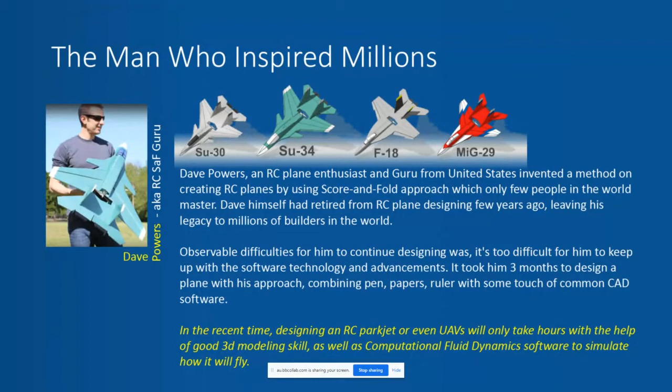Moving on, what is score and fold RC design? It's pretty much like origami of RC planes. We start with a very flat Depron, 5 to 6 millimeter Depron sheet, and form it into a 3D fuselage without any sanding, because we try to copy how origami objects are made. With origami, you have a piece of paper or more pieces of paper, then you just fold it. But with this 5 or 6 millimeter thick Depron, you cannot simply fold it, it will easily snap. So what you do is place tape on the bottom, the other side of the surface.

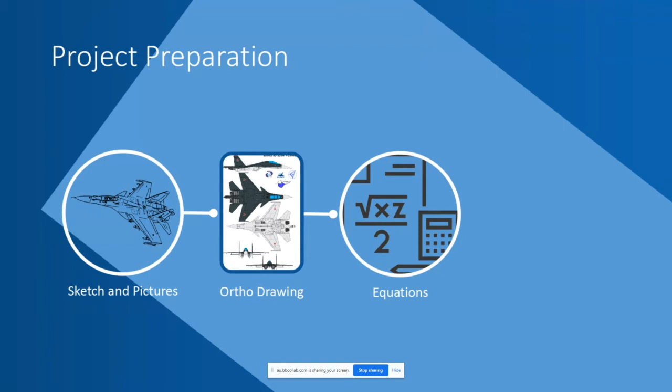So math is our daily subject, but not with the equations. Let me concentrate on this later on. Okay, so the next one is actually two. Come on, my mouse is not working again. Okay, that's it. Choosing the 3D software.

So fortunate that my company is one of the distribution partners for Rhinoceros, so I simply get Rhinoceros for my main design purpose software. For my hobby, for work, designing unmanned aerial vehicles or aerial platforms, for commercial as well as military purposes, Rhino has been doing the work for me very, very well.

But don't get me wrong, there are various software available out there, whether it's free or commercial. You have SketchUp, you have DraftSight, you have Blender, and for commercial you have Catia, SolidWorks, Fusion 360, and PTC. Any other software will somehow work. Just pick what suits you and enjoy the journey.

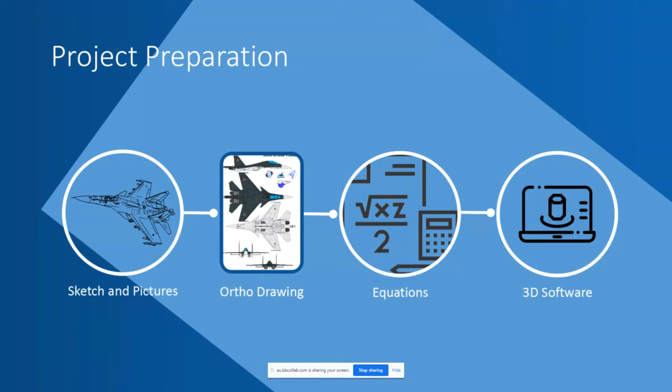Okay, so back to these equations. Don't get intimidated with this. There are many online resources available on the net.

Such as rcplanes.online. They have what they call an online calculator to actually define center of gravity. This is very, very important, because if you couldn't properly define center of gravity, any plane would not be able to fly.

So anything with wings, anything with a body, with also proper center of gravity, it will fly. If you have something much like a pencil or a pen, and you create or design a wing for it, and you define the center of gravity, and you launch it, it will fly. So don't get intimidated with equations.

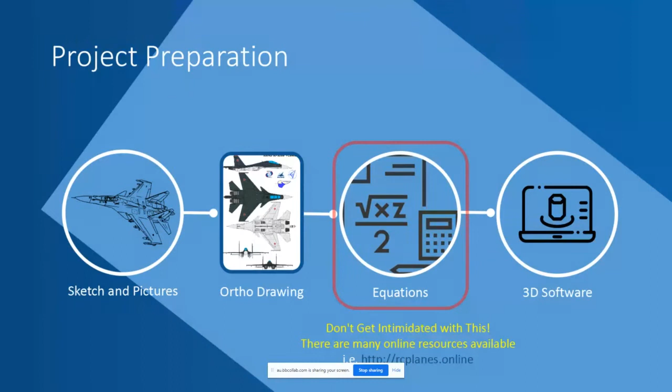There are a lot of equations I got from NASA journals or DARPA or published books. But to begin with, this source is enough because it has an online calculator and you don't have to get confused with many parameters.

So in designing a plane, we need to put common sense in it as well. And what are the common senses, right?

In order to define the size of the structural design of this, let me show you the SU-30SM, for example. I also place some considerations into the design that will minimize potential issues, such as the wing won't fit the plane size, or the wing size won't fit the Depron sheet.

That will be an issue because the largest Depron sheet available is about A0 paper size, about 1100 by 800 something. If it's too big, then you will have difficulties cutting the panels and constructing the plane. It's too small to construct, and too big to construct.

Another issue is once it's constructed, it simply won't fit a normal car for transport. So what's the point of building large planes when you couldn't bring them to your flying field? That's an issue. So based on my personal experience, I mostly design my planes with 750 millimeters wingspan. That's the first parameter I use to create or design a plane. So the wingspan is between 750 millimeters up to 800, or at most 850 millimeters.

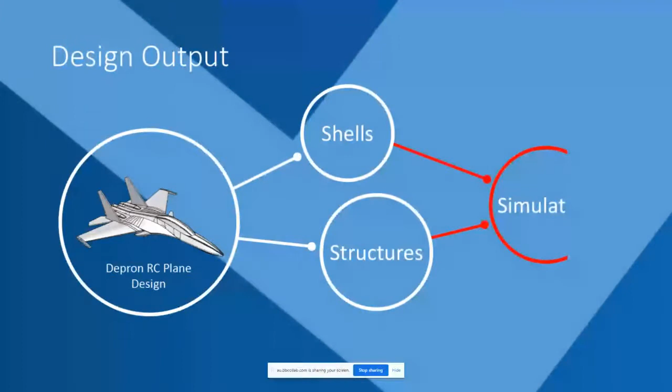After you design the shells and the structures, another optional way to know more about the plane is to simulate it. If any of you have heard about CFD, computational fluid dynamics simulation.

It's pretty much like having a virtual wind tunnel inside the computer. With CFD software, we could define and get a prediction of how it will fly with all-up weight, and with the design, we could know the lift, we could know the drag. Most parameters we could address in the CFD simulation.

Commercial CFD simulations tend to have a big price, like a couple of thousands of dollars, maybe tens of thousands of dollars.

But there is one very good CFD simulation software called OpenFOAM. It's free and it does the job well. I've been using OpenFOAM for my main design requirements, and it answers all the challenges that I needed very well, so I recommend you guys look for OpenFOAM. It's free, you can simply download it, and the visual programming is also available as ParaView.

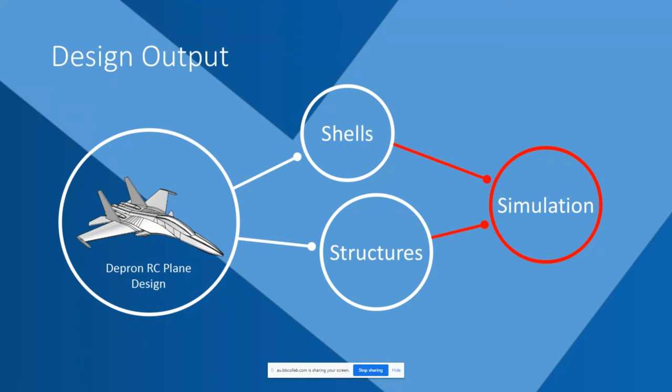So after we simulate, we come up to a design that we will create. This is the SU30SM design, 3D design in scored and folded form, in Rhinoceros. It had been through the CFD simulation with OpenFOAM. So this is the final design.

But before I go with this, I need to mention that if you're comfortable with Blender, SketchUp, or other software, just go with it. If you'd like to go higher, toward commercial options, you need to go with choices like SolidWorks, PTC, Rhinoceros, or other software. But many people out there have successfully created RC planes using Blender and SketchUp. Those two free softwares are available for everyone to download and access, and they're pretty powerful.

But I encountered a few requirements that those couldn't help meet for my personal needs. So I chose Rhinoceros to go with, and we could look at a live presentation with Rhino right now. Let me open Rhino, there you go.

So John, can you see my Rhino screen at the moment? Yes, yep. Okay, clear, awesome. Yep, awesome. So this is the SU30SM, as you see, right?

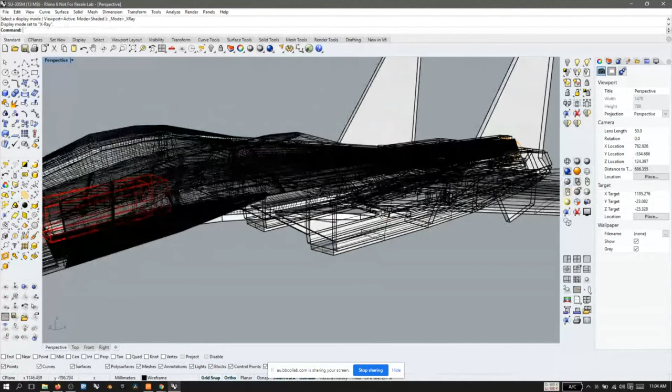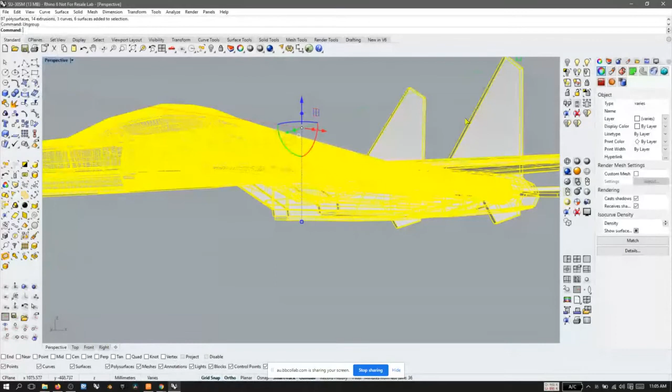If we see it with the X-ray viewport, see the structures, the tabs, the registers, it's there. Let me just ungroup this first. This is the internal view of the structures. You need to have registers to align the panels onto other surfaces.

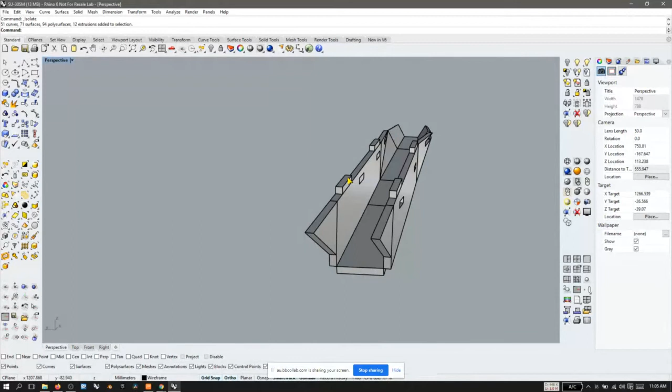So this is the process of how I created the design. Instead of showing it one by one, since at the moment we don't have much time to do it, I need to show you this. So, John?

Are the students familiar with 3D software? I believe they are, right? They have, but not Rhino. And OpenFOAM—just now you mentioned OpenFOAM is also a 3D software, right?

OpenFOAM is actually a computational fluid dynamic software, not 3D software. It's meant for simulating fluid, airflow, any kind of fluid dynamics—those could be simulated in it. It's quite resource-intensive, but it's free.

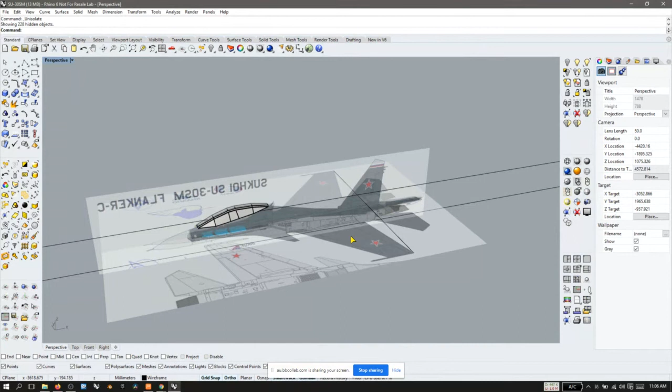Which means you can model something in Rhino and then bring it into OpenFOAM to create a simulation. Exactly.

So with this, let me show you. What I'm going to do is begin with a very simple process: the scale. I need to have the exact scale of a model which carries a 750 millimeter wingspan.

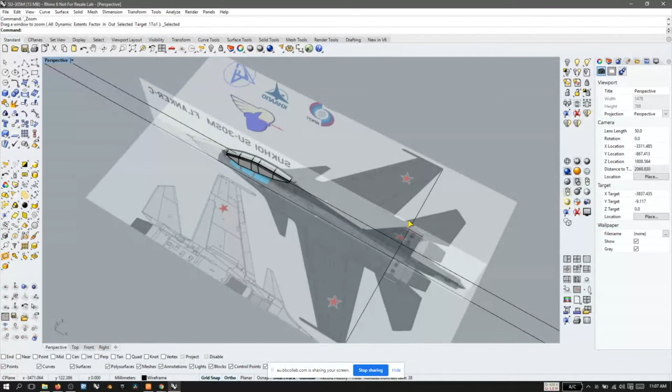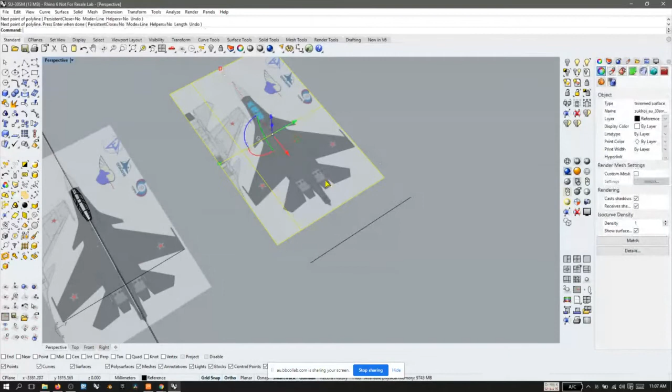So I just copy this. There, I'm going to have exactly 750 millimeters. Next point—that's 750. But when I drop the picture, it won't automatically be 750 millimeters.

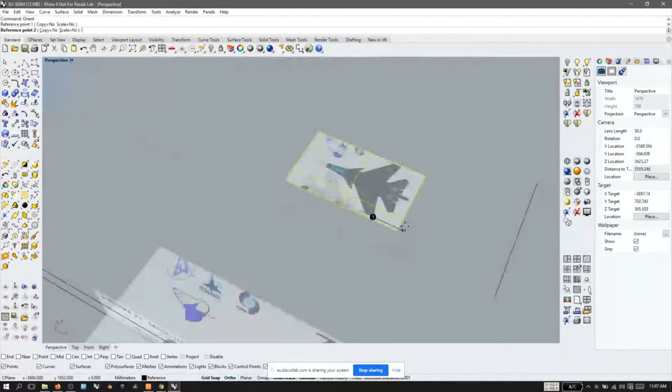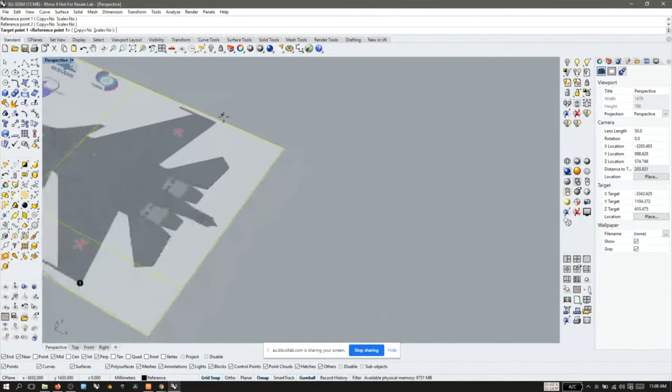Oh sorry, hang on, I did it wrong. Reference 1 here, reference point 2 here. Okay, I need to have exactly 750 here, here, and then scale it.

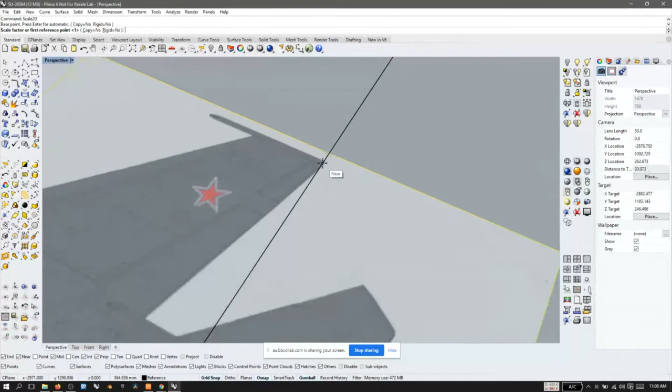See, it's scaling up following the reference, so I'd like to make it exactly 750 millimeters wide for the wingspan. There you go. If I click this and analyze how long it is—length is exactly on top of this, 750 millimeters upper left. Okay.

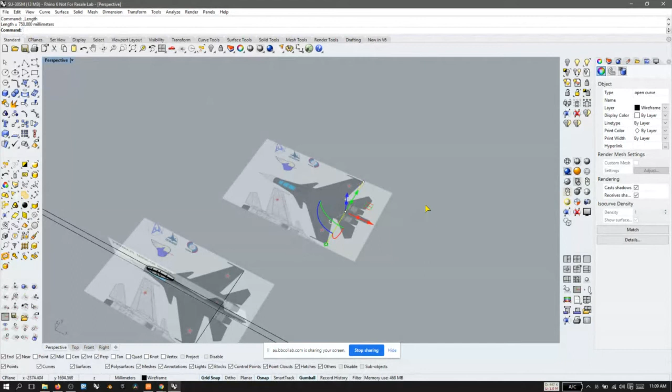So this is the size I want for the plane design. I match the other view as well, this one. After matching it, I begin with, I don't know, probably the wing or the canopy or something else.

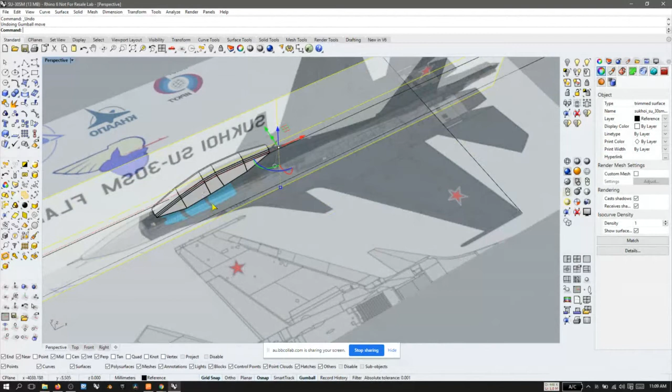I'm going to show you guys how to create the canopy. It's actually pretty simple—go with other view. Hang on, there we go. Here, start with line.

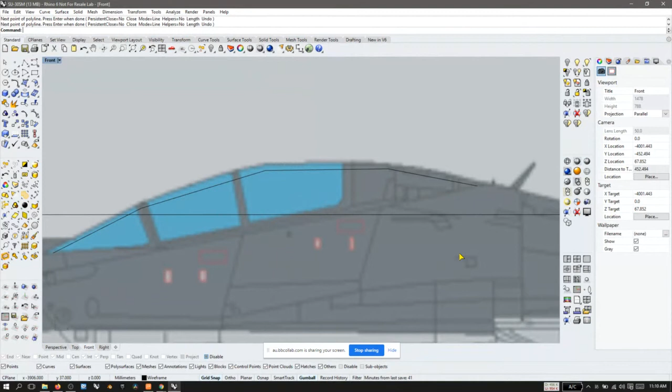Disabling it, starting here, probably, and here, here, here, and here—that's the first one. I need to lock this so I don't accidentally choose that.

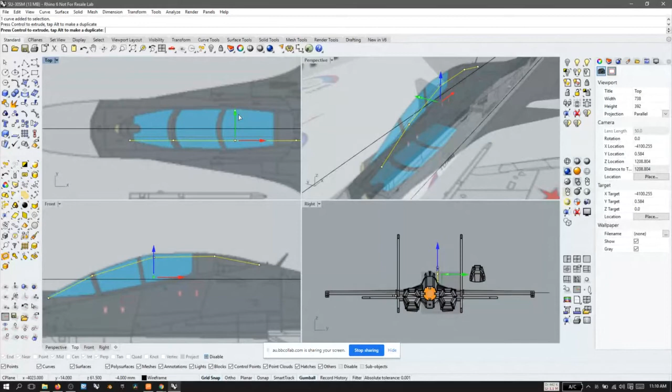This, we need to move it a little bit, and we could see the reference up here, right? And then we create another one from here. Okay, enabling the object snap again.

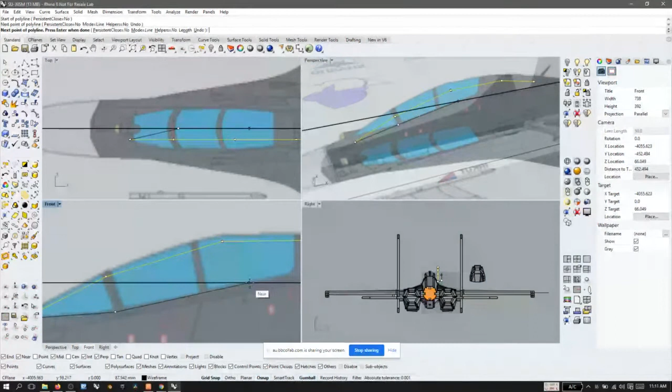Project: 1, 2, 3, 4. Oops, sorry, I actually selected the wrong one. Okay, should be here, here, here, here, and the last one is there.

No worries with this. So activate the sub-objects, drag it here, right, and adjust the point accordingly.

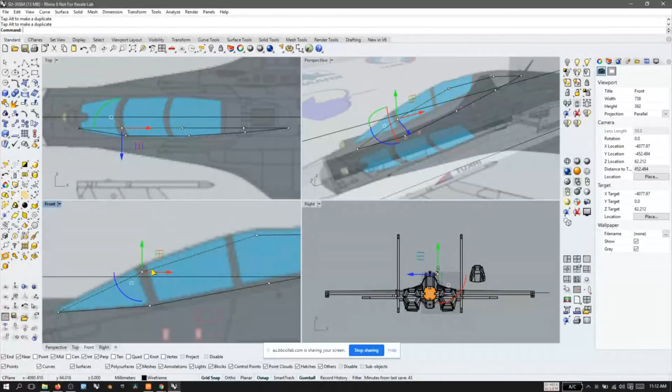Since we're using 5 to 6 millimeter depron, why not align the position of the points or lines exactly at the end of this guidance for the canopy, because it will carry about 5 millimeter thickness. So if we have a surface on top of this, it will have an additional 5 millimeters. So I need to reduce or move the lines and points and reference about 5 to 6 millimeters—not exactly, but it will help maintain the shape of the plane once it's constructed with 5 or 6 millimeter paper sheets.

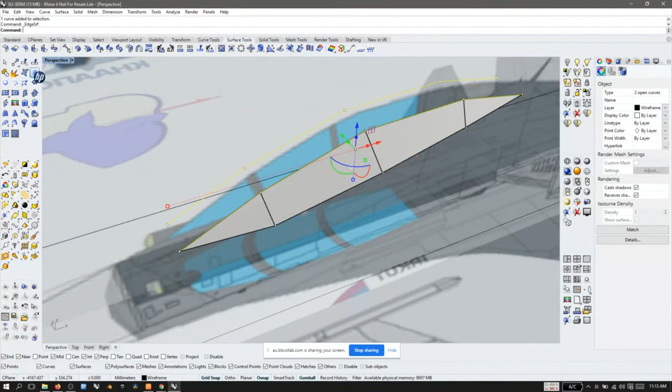With this done, I simply copy the other, this first line here—just simply, we can do it mirror, the old-fashioned way, like that. Then create a surface here using a surface tool, like that, and here and here, curve, create another surface. Then here we could just select these two and extrude it accordingly.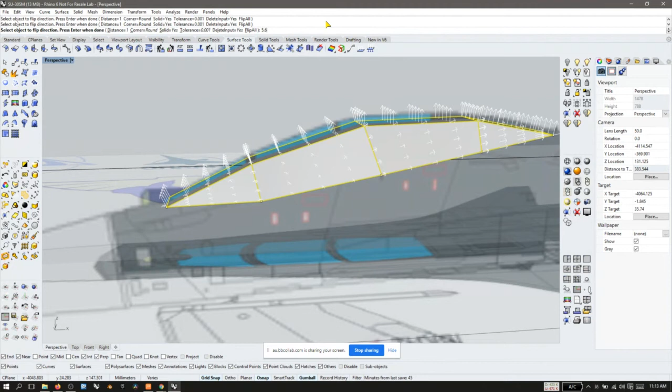So we'll give it a shell, like that, with 5.6 millimeter thickness of the sheet, because when I couldn't find 5 millimeter depron and only 6 millimeter was available, 5.6 is actually matching between the 5 and 6. So I'm using 5.6 millimeters.

Okay, that'll do. Select this and select mirror again. So we have three panels already to begin with.

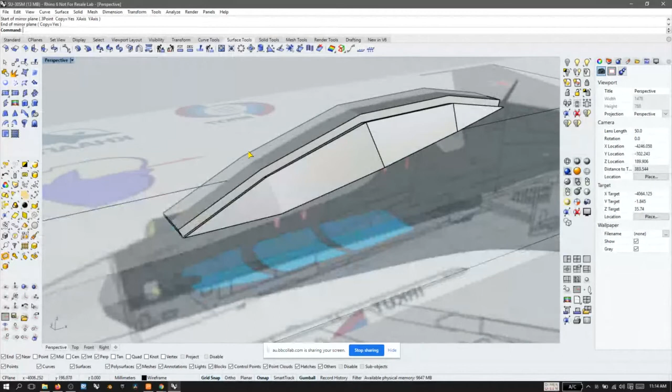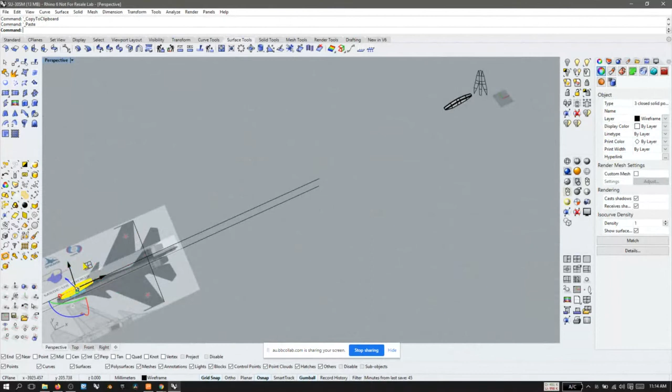Since it's constructed from very thin depron sheets, we need to convert it into a layout plan. So I just select these panels, copy it, paste it, drag it here—pretty much like this example.

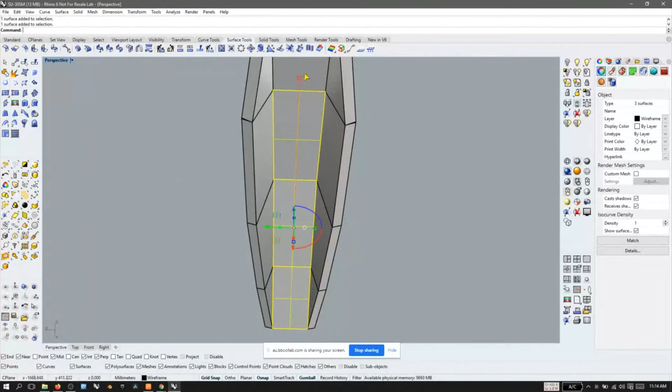And then what would I do? Simply explode it and select each—this, and this, and this—and put them together again. Select it, oh sorry, this should be adjusted as well. Okay, this, and this.

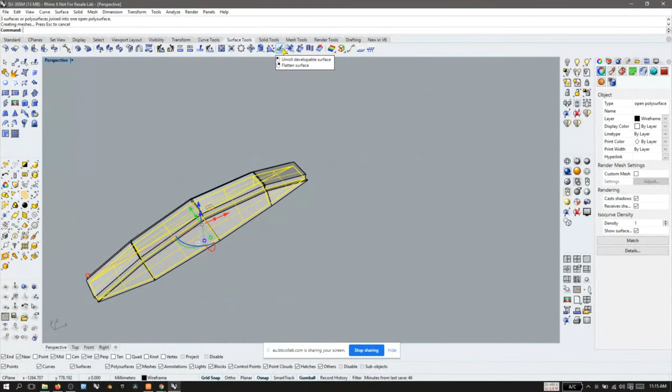One very useful feature in Rhino is actually unroll the surface. So this is the surface that we would like somehow to put as a plan. Okay, this one.

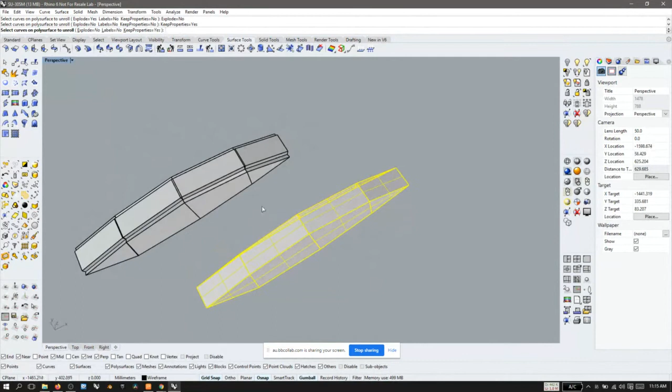Unroll, explode, no. Labels no, keep properties, yes. So I set all these options to the standardized options that I mostly use to explode, to unroll this. So I just execute, and this is the canopy. It's pretty much like a flattened origami object, a box or a bird or something else, right?

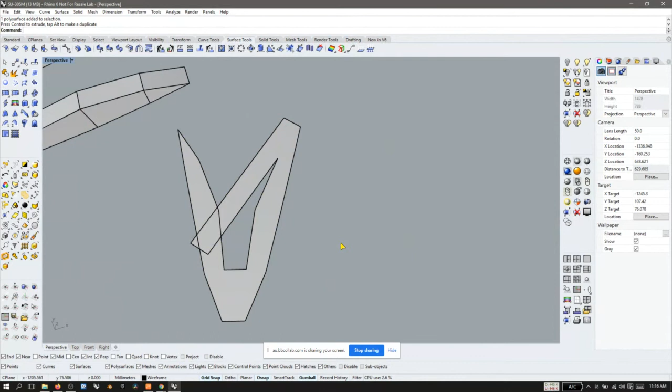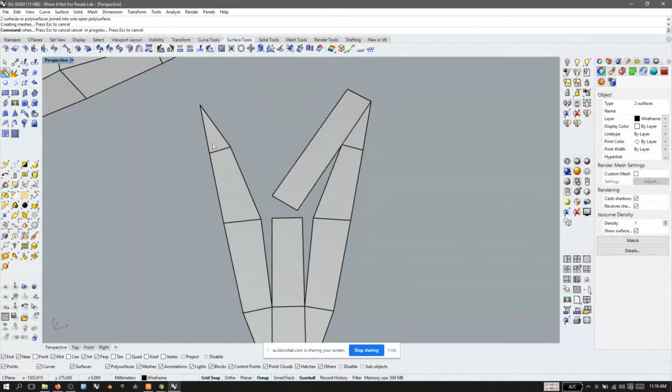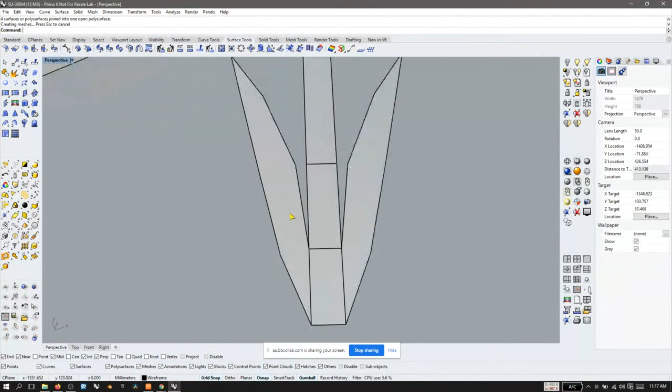And we could just unexplode this and have different results. So we need somehow to orient each panel first. Here, replace here, okay, or here we could just somehow union this, right, or join those, and then again orient it here. Or we can somehow do this and this, okay, and orient them like this.

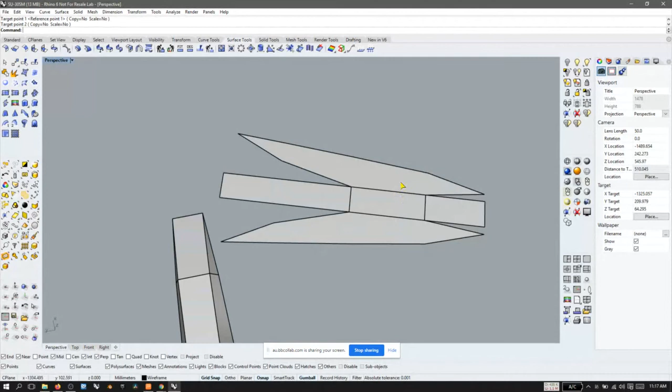Why? Because it's much easier somehow to actually cut panels, right? These two particular lines will somehow be cut as score, not cut, right? So I will score this and place tape below the surface of these two panels, in between the two panels there, because I need somehow to fold it, right?

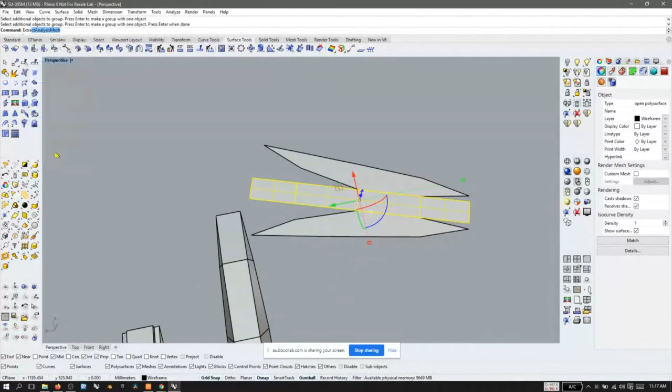So once the design is complete, join or group, whatever, okay, I could just simply extract the wireframe. Extract the wireframe here. Oh sorry, I need somehow to select all of them. Extract wireframe. There you go.

So I will somehow remove any useless lines. Yes, oh sorry. Yes, Bimo, I have... yep.

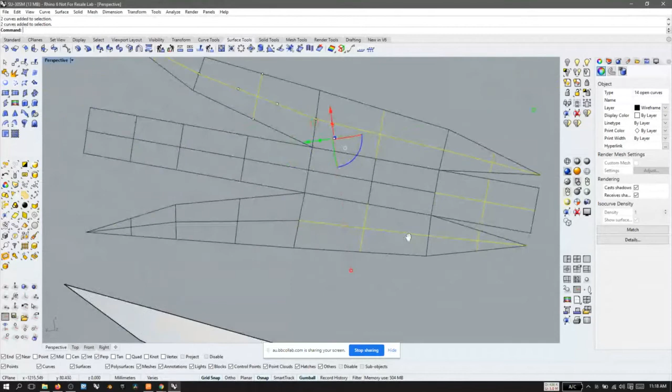A student, Bridget, is asking that the whole idea is that to do it like this, to do the orientation like this, is so that we can print it out using a 3D printer and then create, right? So the whole idea is to combine the 3D with the concept of origami and to form the plane.

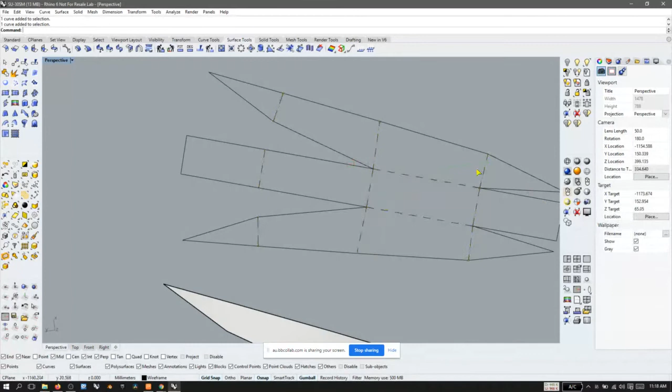Okay, it's actually not for 3D printing. We will somehow create a layout, right, for the Depron sheet. So, okay, let me somehow finish this. It's finished already, sure, right?

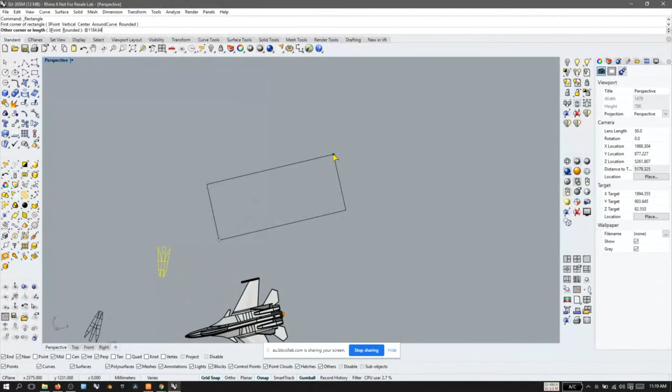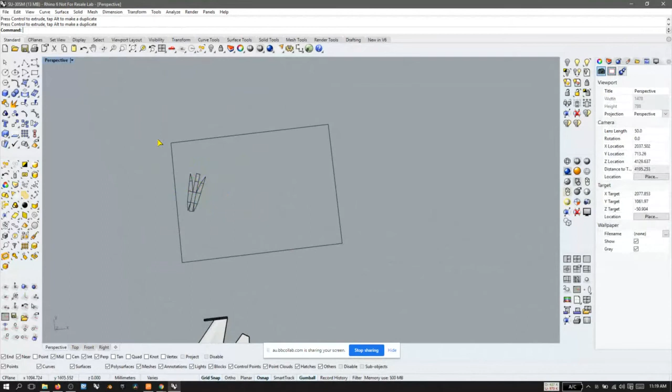So if you have, let's say, a Depron sheet consisting of 840, sorry, 52 by 840, right, like that. This will somehow be printed using a plotter or big size printer, right? So once you place it here and it gets printed, okay, this particular whole sheet will somehow be printed and then placed on top of the sheet. And the lines will somehow be our guidance, okay, to cut the Depron sheet. The dashed lines will somehow be lines that we need to score, not cut through, okay.

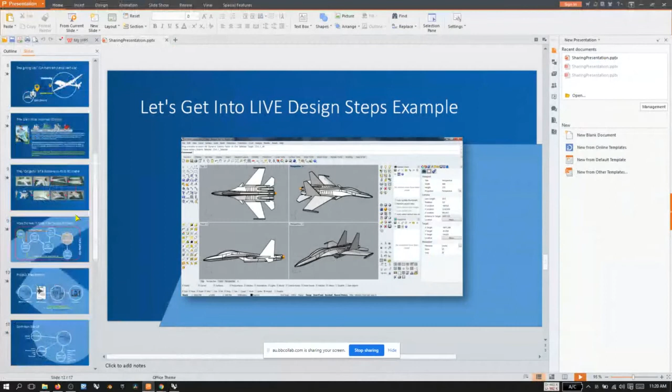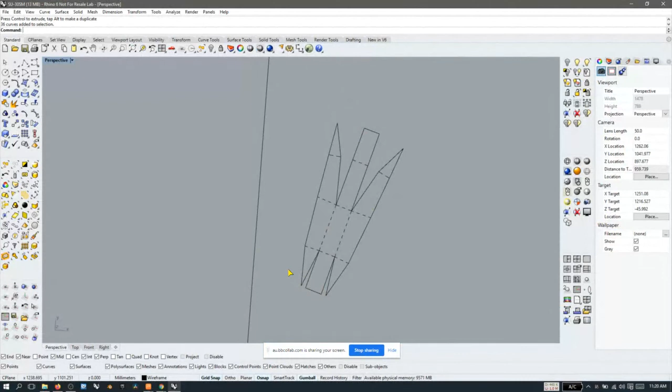So, okay, let me get back to this. Okay, these are actually the very flat Depron sheets, right? So prior to this, hang on, we have plans printed on paper and then glue it on top of the Depron sheet, on top of this, right? On top of the Depron sheet.

So the solid line will somehow be our guidance to cut through the Depron sheet, but the dashed lines will somehow need to have tape placed below the score line. Okay, so we will somehow break it. It will somehow stay there, and then we could simply fold it like this. I don't know whether it's clear for you guys to see, right?

So it's not for 3D printing. I haven't somehow moved into 3D printing for public release yet, but we already have some designs like tilting motors, right, so it could perform vertical takeoff or vertical landing. So the wing carries two motors at its end, right? So the tilt will somehow require 3D printed objects, to support the structures and everything else for it to be very, very rigid. But for this design, this particular design is actually for cutting the Depron sheets, not for printing objects with 3D printers.

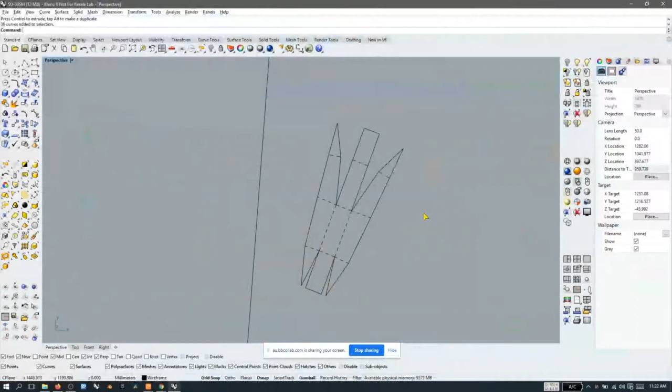So does it answer the question, John? Yeah, I think the student said it's basically like making a template. Exactly, a template pattern for us to guide us to cut the Depron sheet. I see. Okay, so basically...

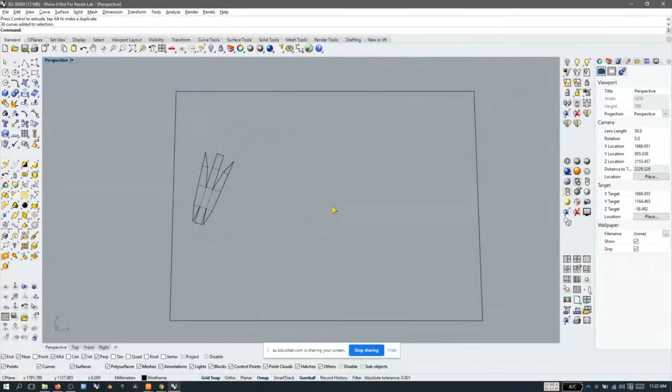Those are the steps needed to actually turn this plane. Okay, let me have a very good example with this wing. So I just simply copied it, right? It is actually a very good one, like this.

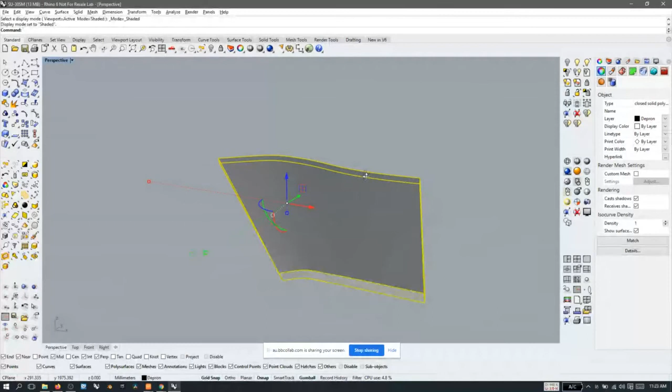And you see that it carries a different shape because it's Depron sheet, a very thin layer of Depron sheet. We could somehow shape it the way we want, right? So with small, pretty much small curvy shapes, we can just simply do that, okay?

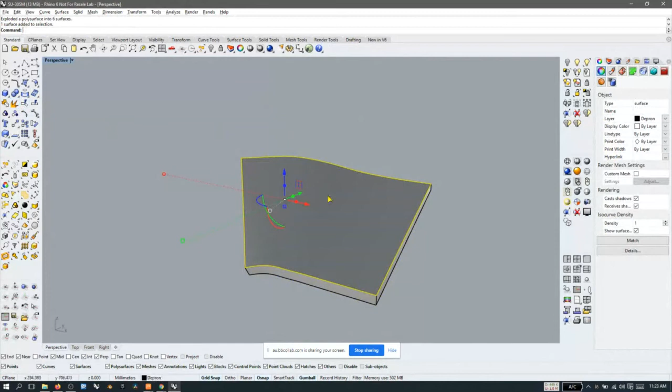So how do we somehow put this into a template? Select this, explode, select one surface, right? Surface tools, again, unroll it, okay? There you go, so it's very, very flat. And another process, extracting the wireframe like this.

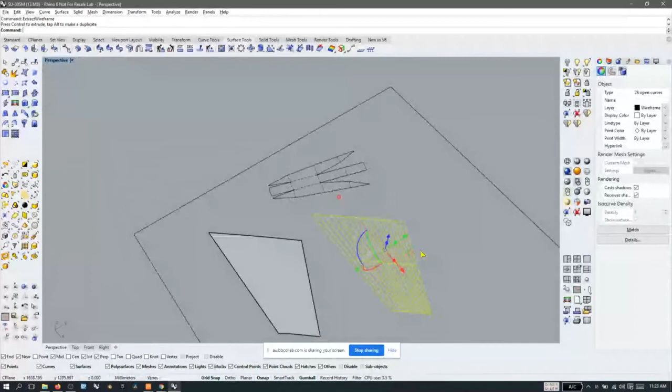Okay, hang on. So I just need to remove this, this, this, this, and this. Oh, this one.

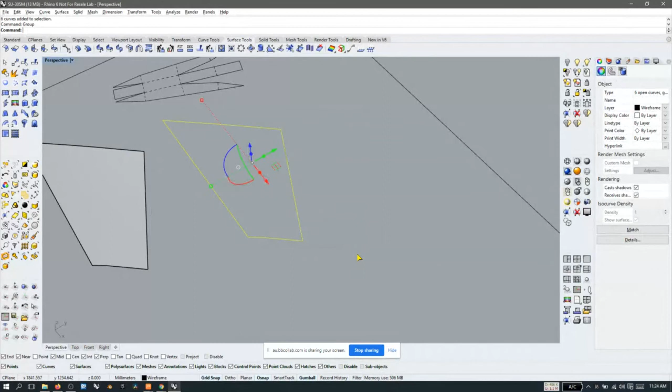Okay, so that's the template for the wing, right? Pretty straightforward, pretty easy, but it requires us to address the approach to design a very smooth fuselage from these flat Depron sheets.

So this is actually the score and fold approach to design an RC plane, right? A different approach applies to much larger, like 2 or 3 meter wide wingspan, military surveillance aerial platforms I designed. But this could probably be enough for us to begin the journey of designing RC planes or other flying objects.

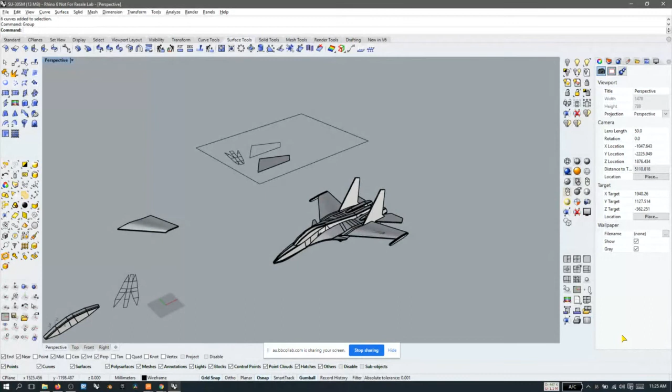So these are the steps to create score and fold RC planes today. We believe that we at Pathflyers International are the only ones who actually apply digital simulation before publicly releasing the design, using OpenFOAM. So every single plane released after 2016, we haven't had any failure because we address any adjustments before the plane is created.

So it speeds up the process, the time needed to design a plane, from the common 3 months of designing a plane by Dave Powers, Jay Raphael, or Stefan Moran. It took us the fastest time of about 1 hour and 15 minutes. Just from 3 months to 1 hour and 15 minutes, that's a huge cut down in time for designing RC planes.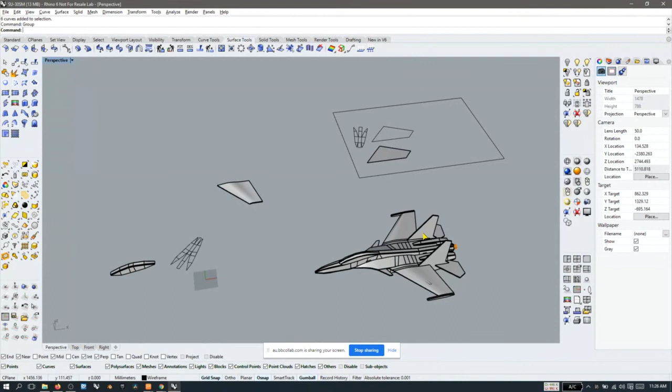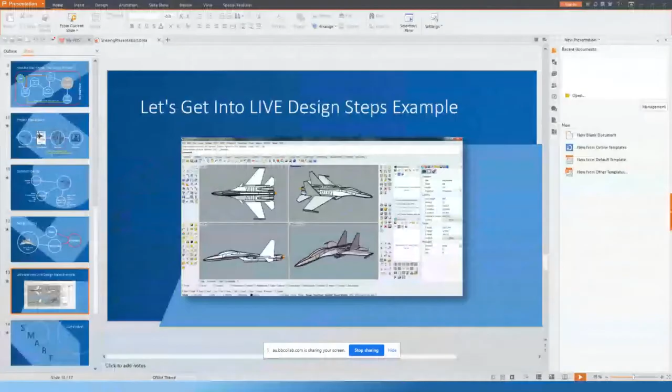Let me get back to the slides again. Yeah, okay. Oops, sorry, that's the wrong button. Okay, any other questions, John?

I have one student who mentioned he used to be into fixed wing RC as a hobby, then moved to multi-rotors because of no space. I'm not really sure what multi-rotors means. It's drones, yeah. So what's your advice to this student?

If the student had come to a point where he's flying wings, right, why did I choose flying wing? Because it flies much longer than a drone. The longest time for my platform to fly was nearly 3 hours. It was flying autonomously with autopilot and all computers installed, and it was an endurance test - it flew about 2 hours, 53 or 54 minutes, if I'm not mistaken. So no drones, no multi-rotor platform can do more than an hour flight time at the moment.

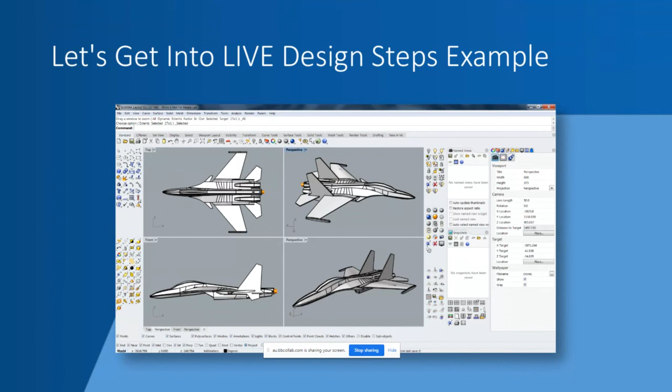Interesting. Okay, let me see if any of our lecturers have any questions. Miss Sujane, do you have a question for me? Oh, we're lecturers as well? Wow, yeah. Okay, she's not responding.

I have a student who asked, is there a person called Peter Sripol? Yeah, sorry, Peter Sripol, who makes very good videos documenting his builds. Exactly, he's a genius guy with glasses, right? I know him. Awesome.

A student is asking, can the Rhino program design other things besides planes? If not, which other program can design other things like 3D people or non-living objects? Okay, if we're talking about Rhino, right?

It's been used by many industries like jewelry design, aeronautics, aerodynamics, and the automotive industry. If I'm not mistaken they own hundreds of licenses of Rhino. NASA uses Rhino as well.

I actually gave training particularly for cut and fill for land design in Kepulauan Riau, that's near Malaysia. So many industries could take advantage of using Rhino. It's pretty much like a generic 3D software for everyone.